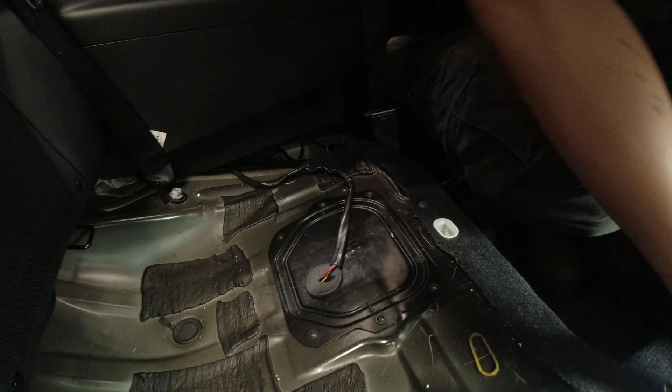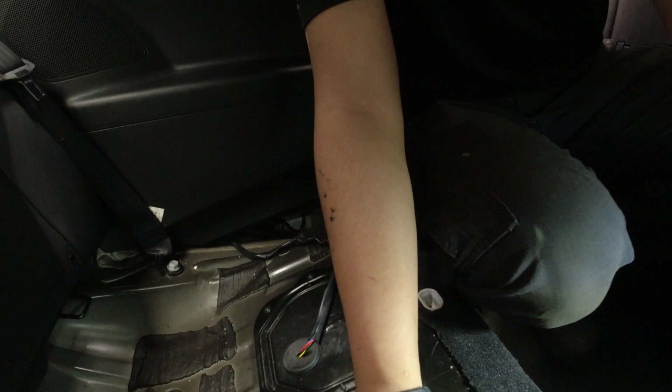Okay guys, so our fuel pump came in. As you can see here, we got one here and there's another one there. Your fuel pump should be the one with more wires, because there's thicker wire here, the red and black, and the other two is just the fuel level.

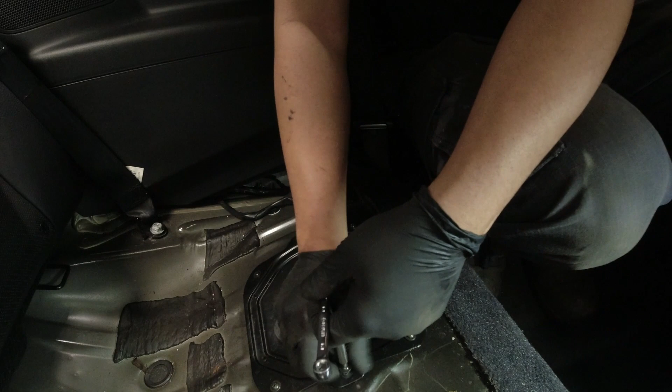So I mentioned too, I forgot to mention that when you do fuel pump repair or any repair, make sure don't use your electric gun or anything, because electric gun can cause spark, and then you're dealing with the fuel. So just keep that in mind.

So let me just remove these 6 screws here. It's holding this cover, and now we will see on what's inside here.

And then after that, I'm gonna hook up our fuel pressure gauge, check our current reading on our gauge, and our amp probe, or how much current that it's pulling, this fuel pump and this pattern. So we will see the difference between the old one and the new one. And we can learn from there how it looks like with a bad fuel pump, that it's not bad and it's still running.

Yeah, so all 6 are removed. I'll just remove this grommet here. Okay, remove this guy, this connector.

So I think this fuel pump is a little bit easier, which is a good thing, because this doesn't have a special tool to unlock or to release the lock ring for the fuel pump. Just all screws, and we got some fuel lines here, one for our charcoal canister and one for our evap, I think.

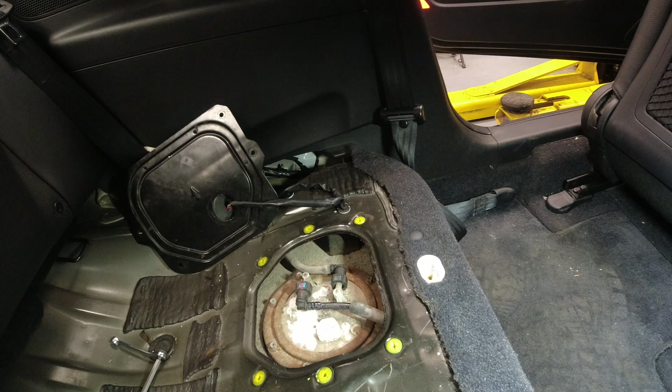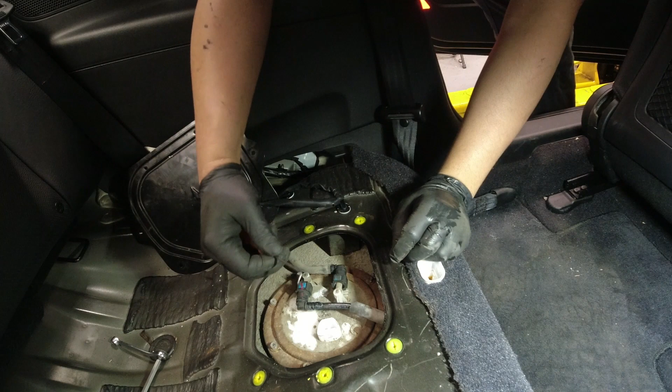I think I need a hook style flat screwdriver. Okay, it's not a flat screwdriver, but it's just a right angle pick, because we need to push these 2 tabs together.

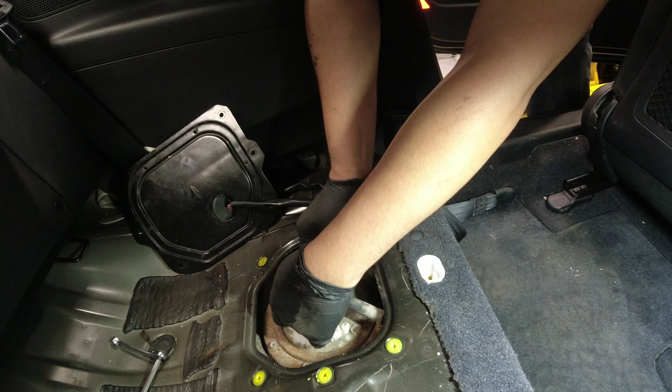Come on, man. Okay, that's out. So this is what I'm talking about. If you guys can see these 2 tabs, you have to push that together. And we're gonna do this other side here. So push it in first. Good.

And work in a well ventilated area, because right now I can smell the fuel now. And that causes a bad headache, man. So sometimes I don't like doing that, because the smell of the fuel, it will stay.

So usually when everything is like that, especially I'm doing a fuel pump repair, I always tell the customer, at least open the window for a while. It will be sucked if it's winter because you cannot open the window, but we can't really do anything about that because it's just gonna get out, or it's just gonna be a while to get rid of that smell.

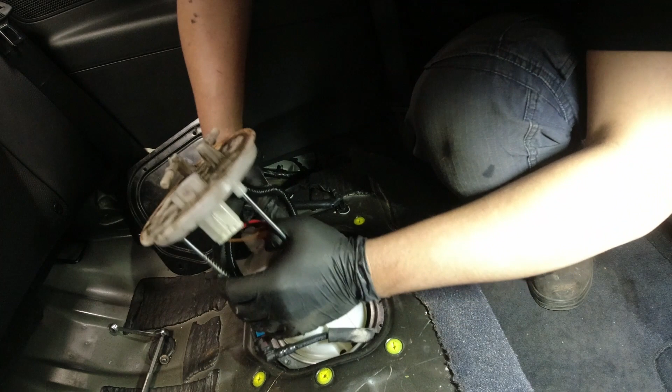And now, challenge part is removing this guy here. So you just have to maneuver, turn everything. There you go. I think for me, that's okay. For me, this is the easiest fuel pump that I did.

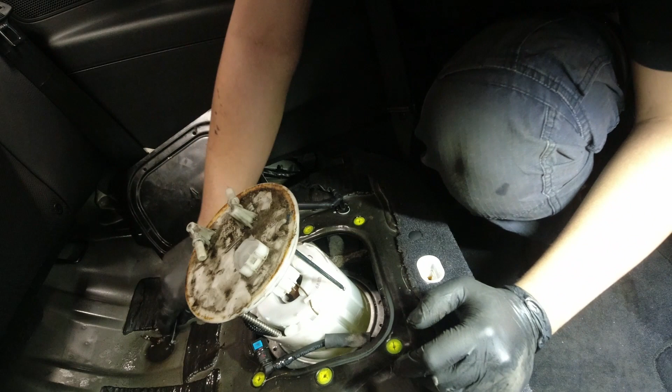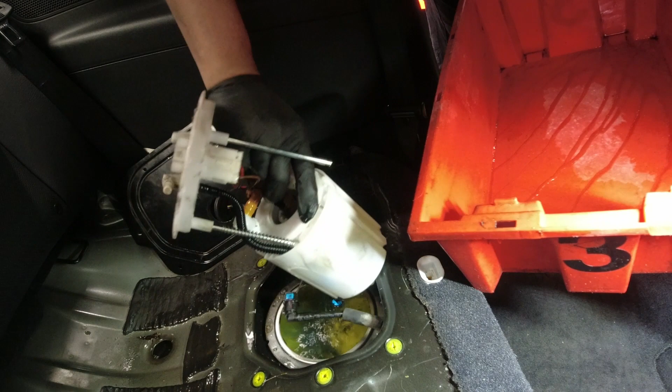Okay, let's remove this grommet here, the drain hole here. Yes. Okay, let me grab a container. Okay, let's just do this quick so that it will not get messy. Okay, that's out.

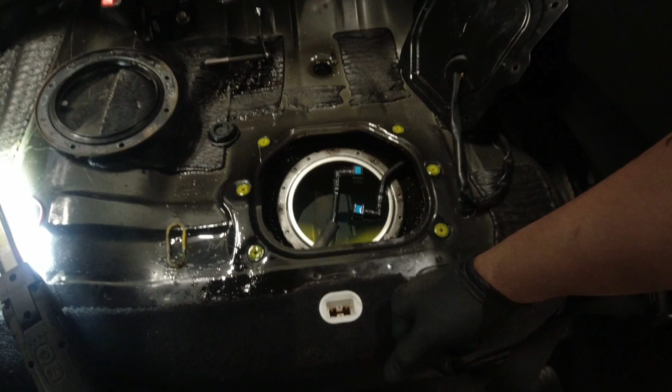We're gonna go in the bench and let's compare the new one and the old one, and maybe we can do some resistance check if we can find that. If not, we'll just install everything and do our verify testing, our verify repair by the fuel pressure gauge and the current ramp.

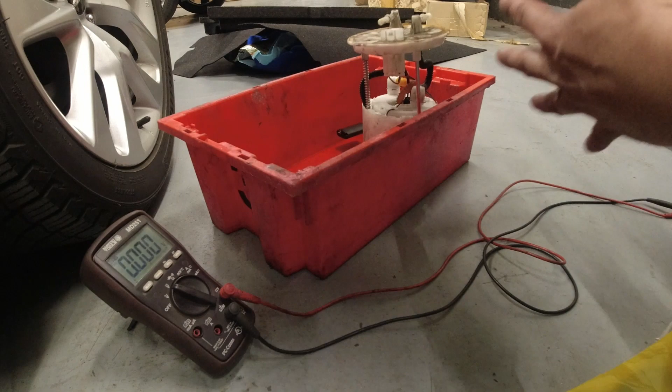Okay, so here's our new fuel pump. There's the part number there, right?

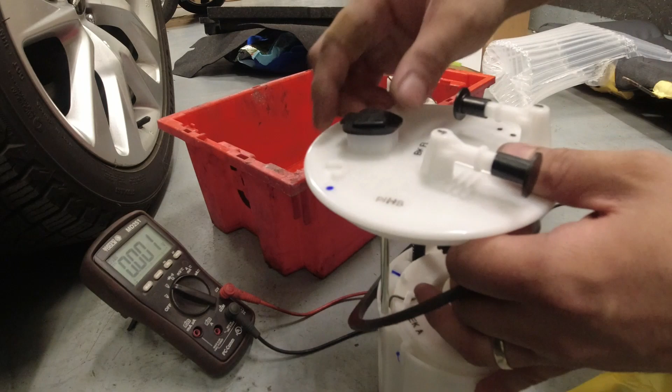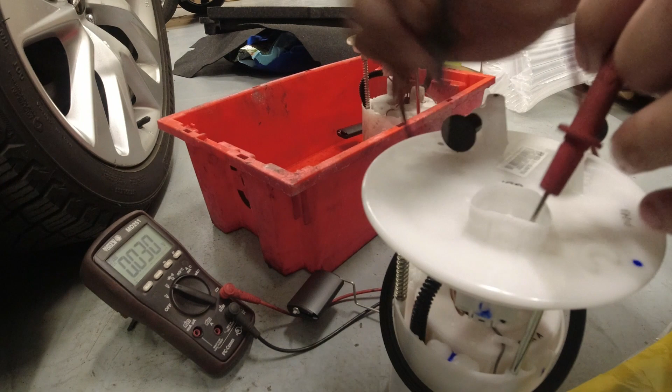I know we're doing a lot of testing, but at least we learned something. So there's two big pins here, that's for our motor side. So let's test first this new one here. Go to resistance check. That shows 91 ohms, 90 ohms, right? Maybe that's for our fuel sending. Let's just double check if this one will change. So 90.

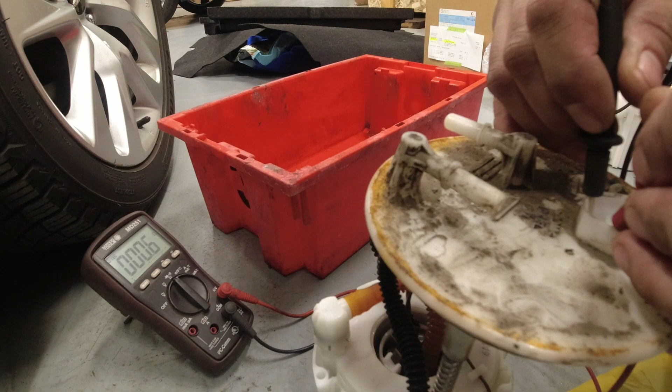Okay, 90 ohms there. That's for our fuel sending, those two. So we're gonna go to the other two. It shows 0.5 ohms for our motor side, and for our old one, let's see if there's a difference. We still have 0.5, not much, 0.6, 0.1 difference. Yeah, you can take that.

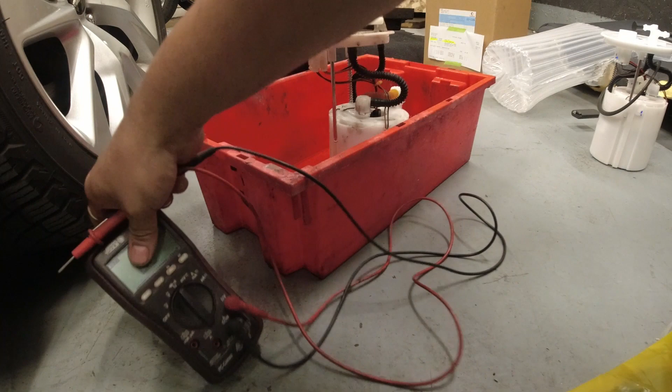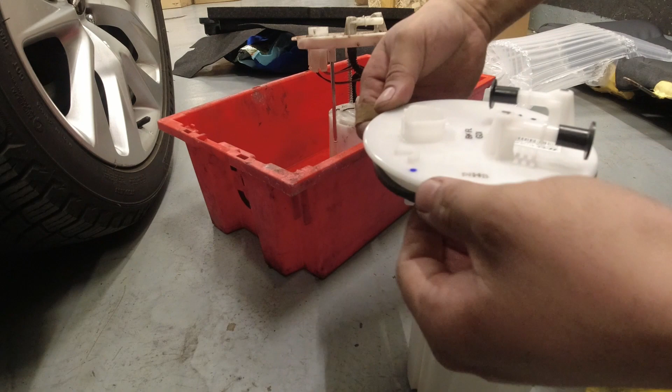So resistance check didn't show much of a difference, just 0.1 difference. So let's just put this in, because we know our pump's still working. It's not really completely off, it's just the pressure there.

So anyway, we're gonna install this. We're gonna retest our fuel pressure and the current draw. Okay, so it's kind of dark here. Anyway, we're gonna install this guy.

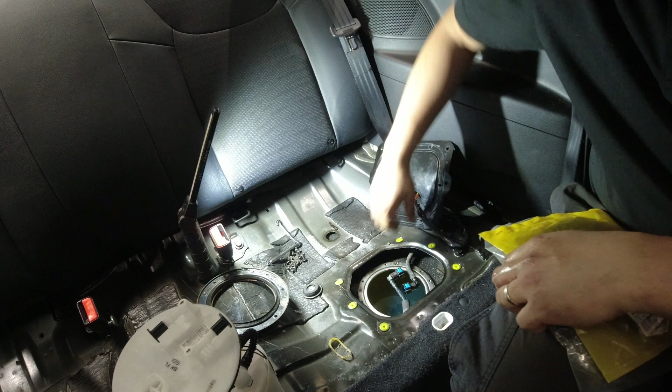Just make sure there's no debris going into the pump. Our gasket for our fuel pump is there, and it should just go in one way.

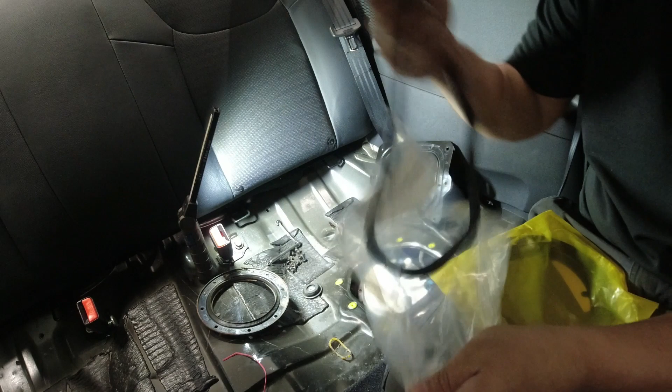Now it smells bad, man. Like that. Okay.

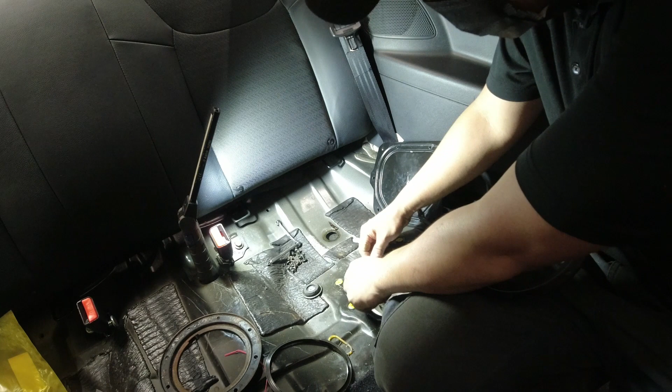So he didn't come with a new gasket, unless this is the gasket. But I removed something in there, no? Did they remove something? Looks like this guy is for this one. Is it the same? Yeah, that's the same, I think there's no gasket in there. Like that.

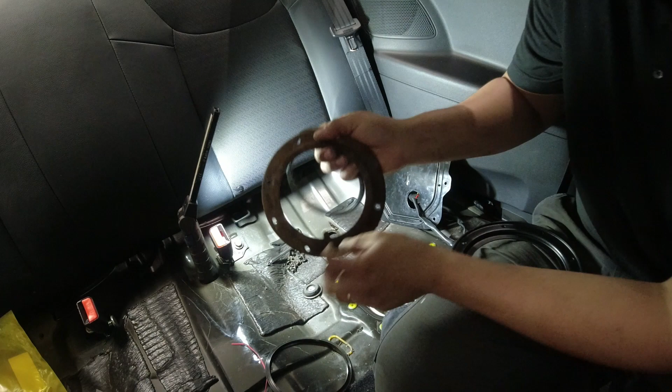This guy should be on top here. And you can see a notch here on this ring, which is this guy here, our new one. That's going in there. But this gasket here came in on the fuel pump, that's what I think, it's supposed to be in there. No, I don't think that's supposed to be, it's supposed to be inside. So let's put this inside here.

Match your hole. Okay, it should be like that. Now we're just gonna put our screws, just hold on your pump.

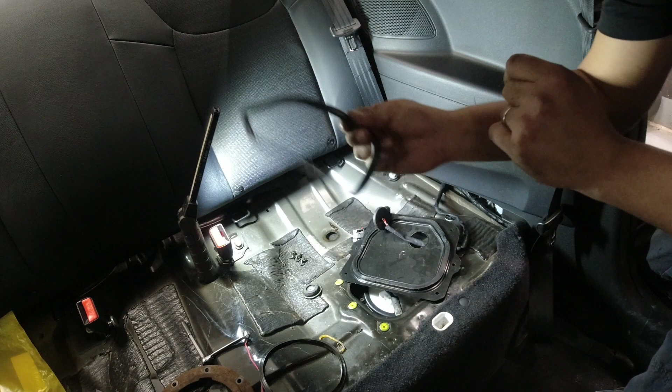Now we're just gonna put our hoses, connector. Now we're gonna replace this gasket, right? So we have a new one for that. I called all the gaskets in this, and then so that should be it. Just remove this guy here.

Oh man, I need to use this. I have to pull this rubber here.

Okay, I just put this back. Wrong way. Come on.

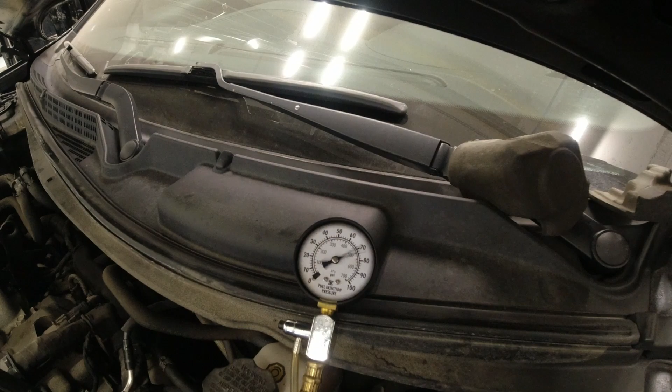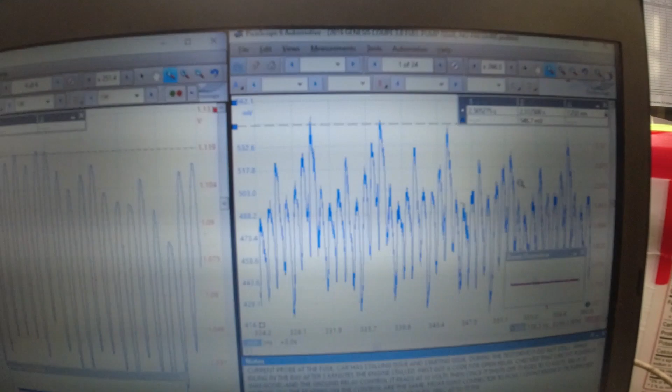So now let's go to our scope capture and let's compare our reading. Okay, so on your right, that's our old fuel pump. As you can see there, that's too much noisier, or if you can say that, it's not even comparable to our new one here.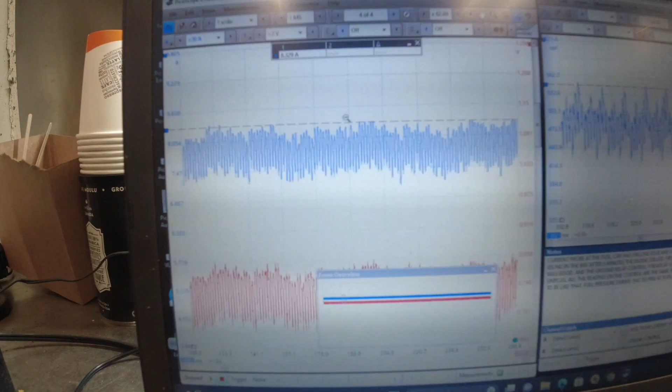As you can see there, let's just minus this so you guys can see it. But okay, as you can see that, so let's calculate the RPM on this one if you can see it. So let's just go here. I'm gonna just put up the time.

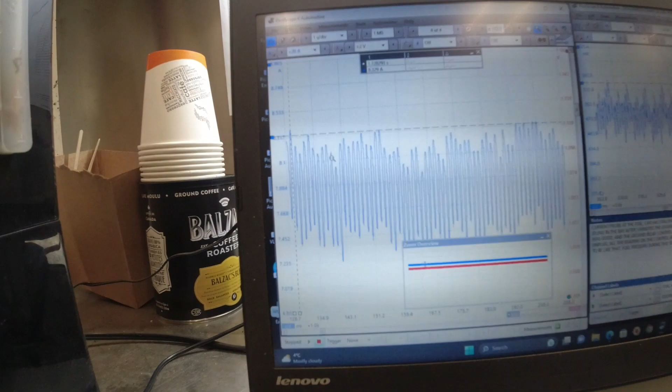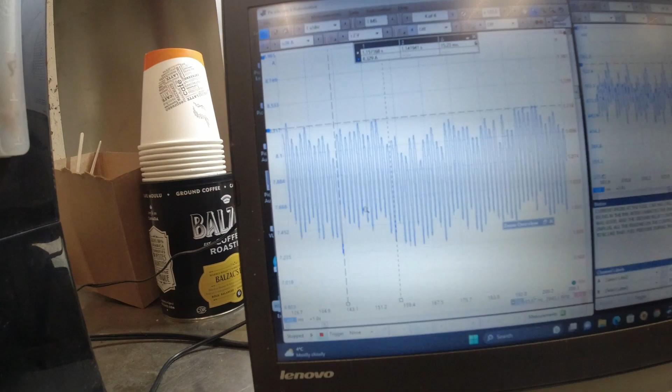So I'm just looking for the same pattern. 1, 2, 3, 4, 5, 6, 7, 8, 9, 10. It's 10. Okay, so let's go down here 1, and there we have the same here at the bottom 2. I'm just gonna calculate that. So as per here, 1, 2, 3, 4, 5, 6, 7, 8, 9, 10. So it's a 10 commutator.

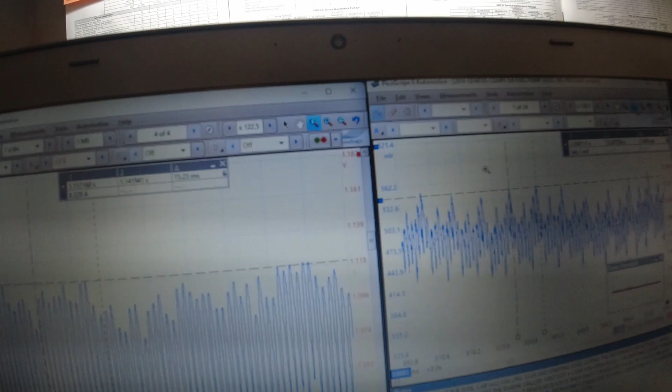In here, on our old pump, we can see that there's a distinctive pattern here. I'm gonna calculate that. So let's do... so in here we got 1, no, 1, 2, 3, 4, 5, 6, 7, 8. So that's 8, and running around 8,000 RPM, that's what it says there.

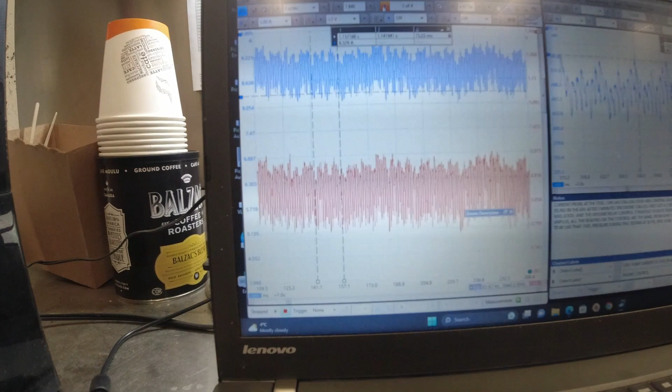But in here, I can't see anything, it's not very distinctive, maybe a different pattern. Let's look this guy up.

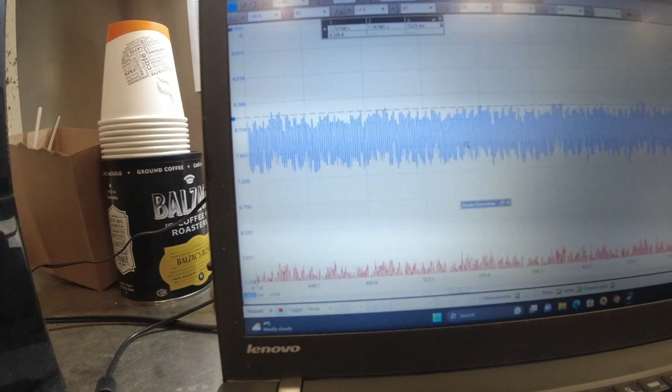I'm just looking for the same pattern. Well, I don't see anything. Why?

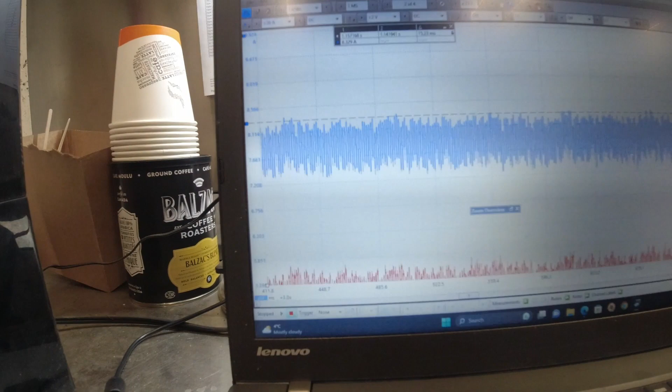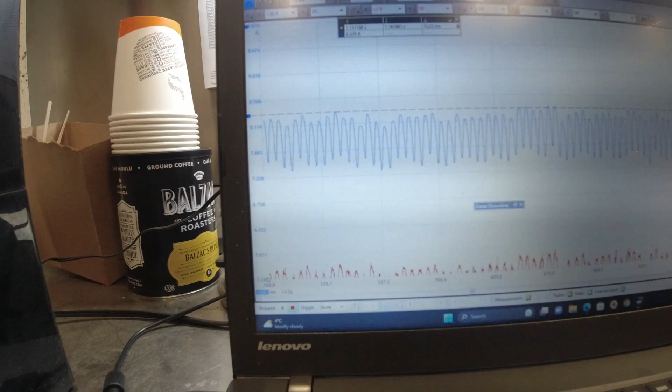That's weird. Unlike on our old one, it's very noticeable. How about this one? This guy here at the bottom, because I use two current probes. Or maybe this guy here. So maybe I filtered it in with this one.

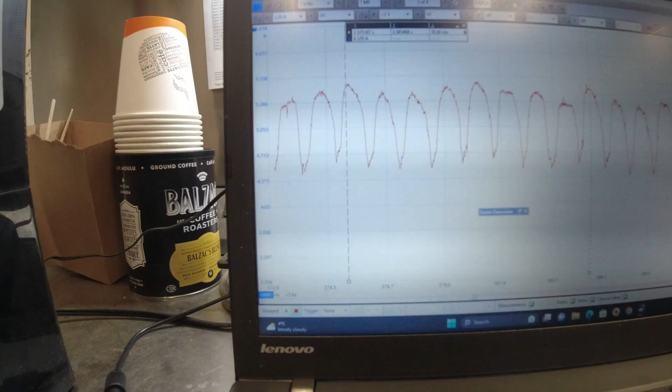So 1, 2, 3, 4, 5, 6, 7, 8. Okay, so at 8, it's running 5,000 RPM there, right? Let's see, I don't know if you guys can see, that's 5,000 RPM. That's my other current probe, and in this guy here, that's running around 8,000 RPM.

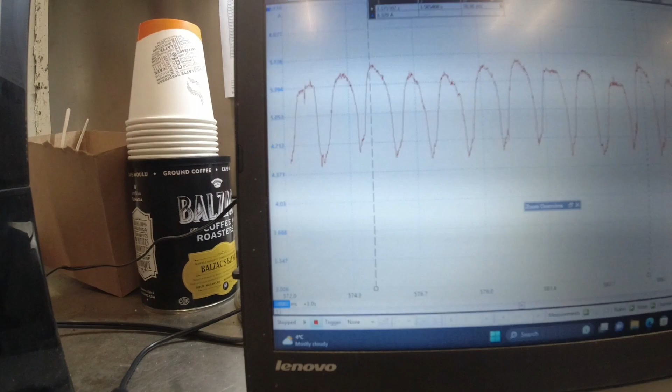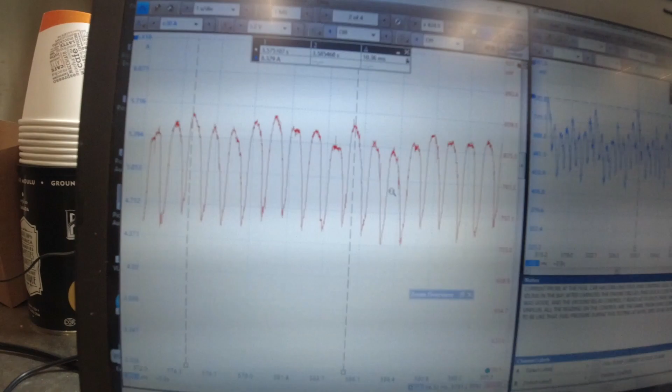And we can see clearly the pattern is way different compared to our new one and the old one. So I believe this vehicle is fixed, and then I'll just test drive this and see if everything is good. But as of now, this guy is pulling at least this much current.

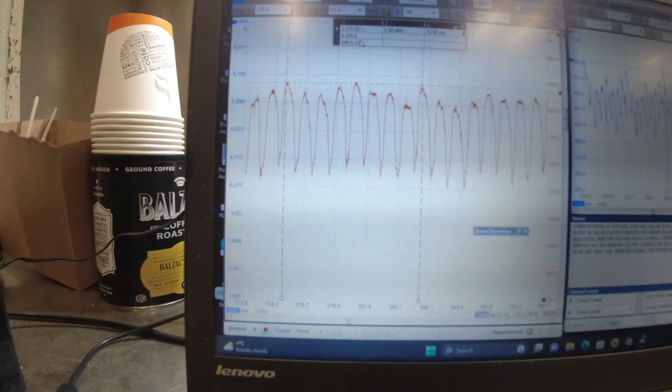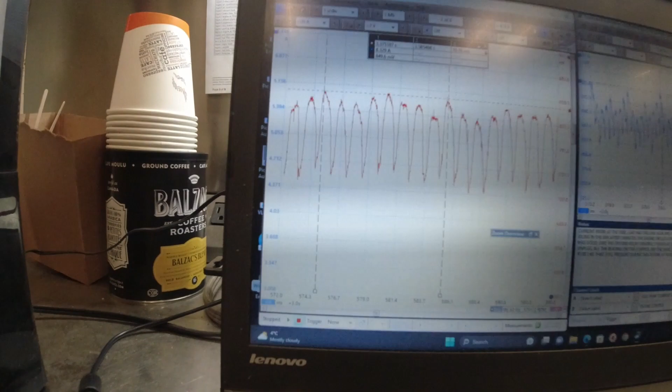So what's the calculation? This one, every 500... so this is 5 amps. This guy is running around 8 amps of running current for this fuel pump. I know it says in millivolts, but every 100 millivolts there's 1 amp on the conversion of the current clamp, and this guy, every 100 millivolts there's 1 amp of conversion. So that's why I said this is running around 5 amps. This guy is running around 8 amps.

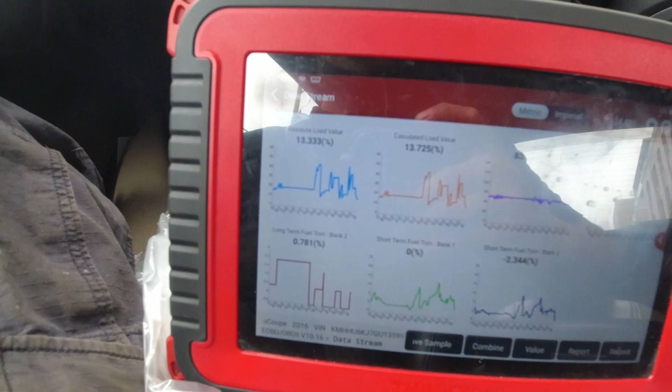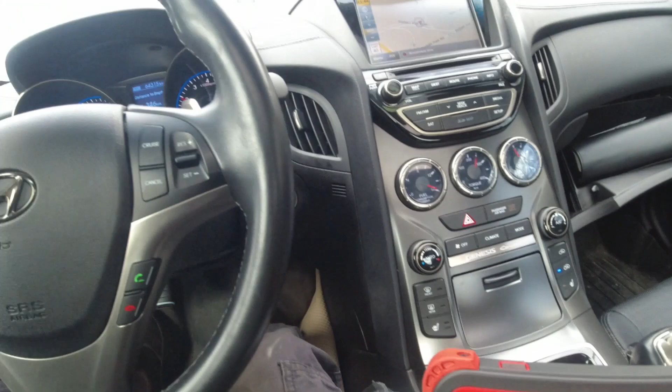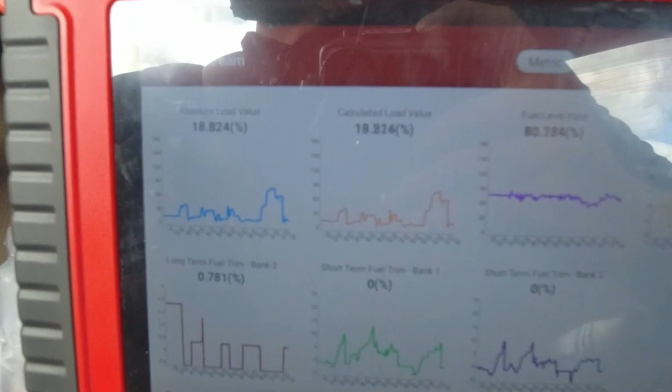So I'm just gonna do a good load here, heavy acceleration. Make sure that my fuel trims are good there. Yeah, that's good, so that's at least less than 10%. So meaning we got good fuel supply, right?

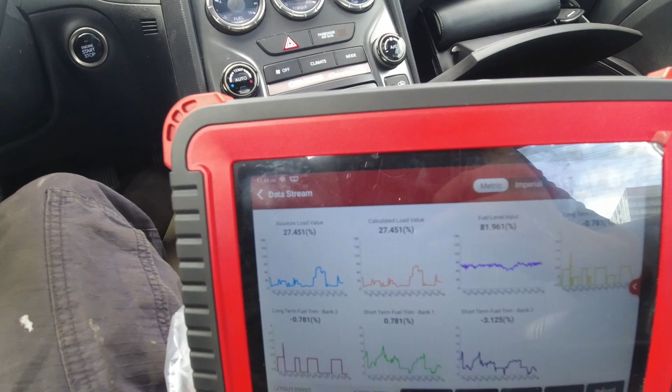I know it was fixed already because we saw our fuel pressure go from 40 from the old pump to 70, 60. So that was a good indication that we fixed the problem. Second, our current ramp on our fuel pump was better looking, and it's pulling more amps compared to the old one. From 5 amps, the new one is pulling around 8 amps, which is a good one.

So last time when we did a test drive, we were too focused on that code for the main relay shut off or control circuit. We thought there was a circuit problem because that can cause a stalling issue or a car won't start, right? But we did focus on that circuit, and we saw that all those circuits involved with that main relay were working normally, and that's why we went to a different direction.

And for me, if I still remember, the easiest thing was just to check fuel pressure, right? Because it happened that it was just cranking and no start, and I think it's fuel related issue. So we did check our fuel pressure and found that it was below specification at around 40 psi. The worst number that we got was 20 psi, and then that's the time it stalled.